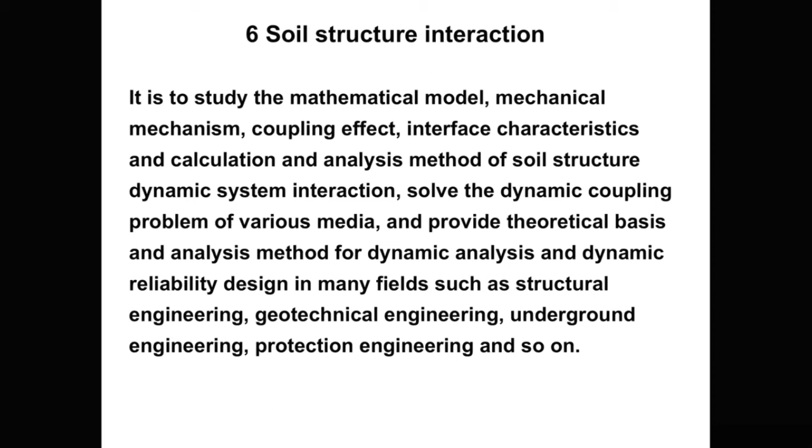The research object in SSI is the seismic wave field, high-rise buildings, large bridges, underground structures, and large dams, connected with the foundation or surrounding rocks in the given input wave field. The dynamic response of the structure and its surrounding soil is studied. Because all these structures are surrounded by rock and soil, the dynamic properties of rock and soil will affect the dynamic behavior of these structures.

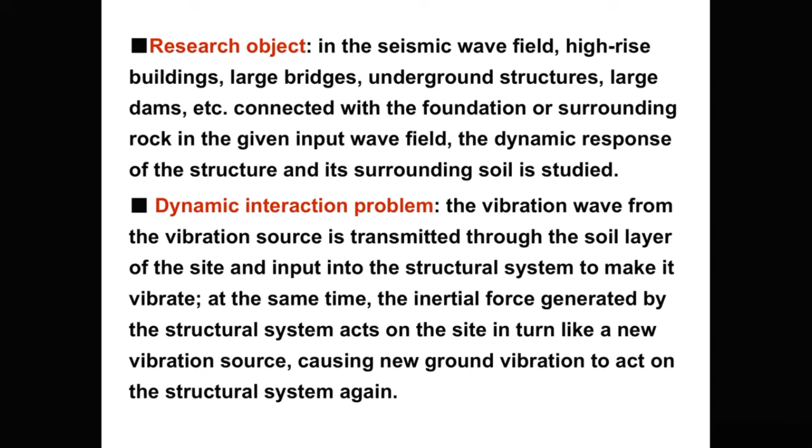If you want the real dynamic response of all these structures, first you must know the interaction mechanism. The dynamic interaction problem includes the vibration waves from the vibration source being transmitted through the soil layer of the site and input into the structural system to make the structure vibrate. At the same time, the inertial force generated by the structural system acts on the site in turn like a new vibration source, causing a new ground vibration to act on the structural system again. This is the soil structure interaction.

Let's see some system. You see a building, a frame building, or an upper building set on the soil, and the soil is layered soil. At the bottom, we can find bedrock. When the earthquake occurs, the earthquake wave will transfer from the fault to the bedrock, then to layered soil, at last to the structure.

This is the system. In the beginning, before we knew soil structure interaction, we took the soil as a rigid body. Then we applied the earthquake wave on the rigid block, like a base of the upper buildings. And upper buildings we can describe by some mechanical system. For example, here we give a spring and damping to describe the upper structures.

And we can also describe the layers or floors of the structure. We use mass points to describe each floor, and use spring and damping to describe the connection between the different floors. Then we can analyze the response of the upper structures.

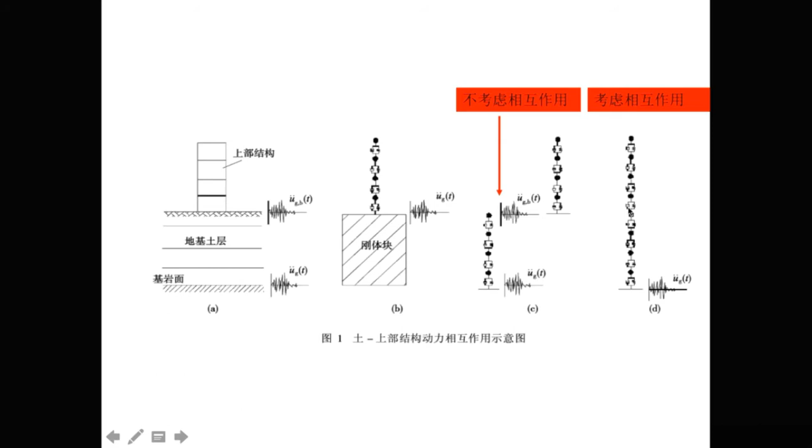Here, let's see some simple models of soil structure interaction. This is a prototype model. A structure using a mass point and a bar. This is an upper structure set on a soil layer.

Then we can simplify it into a model. Upper structure and the frame, using a spring to describe the frame. And the lower part, there's another mass point. In fact, this mass point is soil, and not only the soil mass, but also the stiffness of soil. We use another spring to describe the stiffness of soil. Then we create the simple soil structure interaction system.

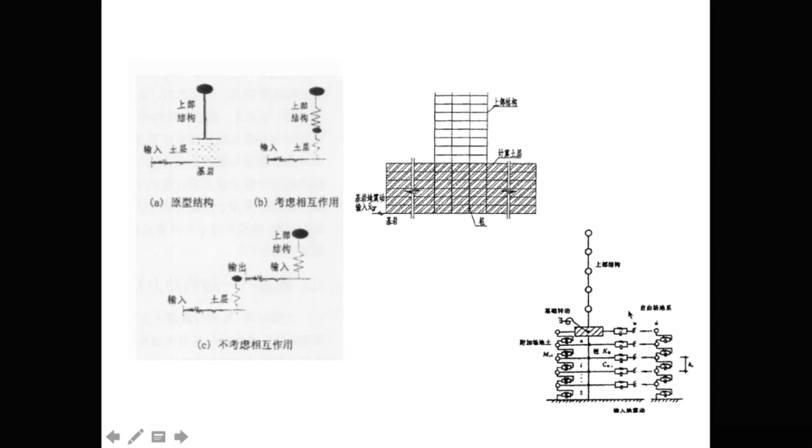But the far field soil will also affect the dynamic response of this system. Then we also use some viscoelastic model to describe the effects of the far ground. Here, this is the model for a complete soil structure interaction.

Or in the soil structure interaction field, this model was developed by scientist Penzien, and we call this the Penzien model.

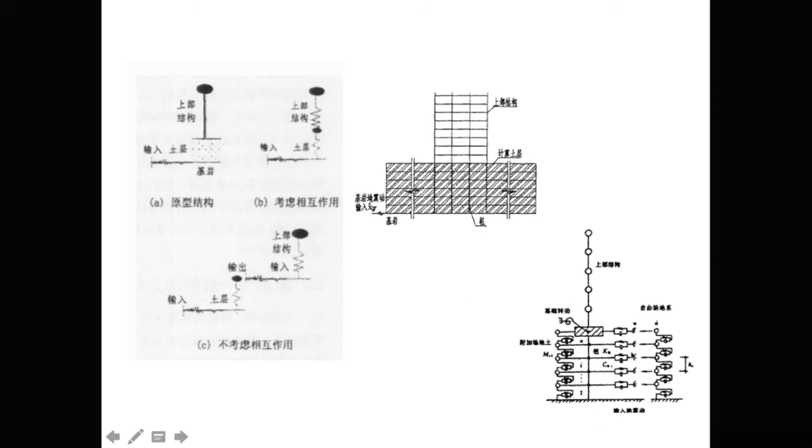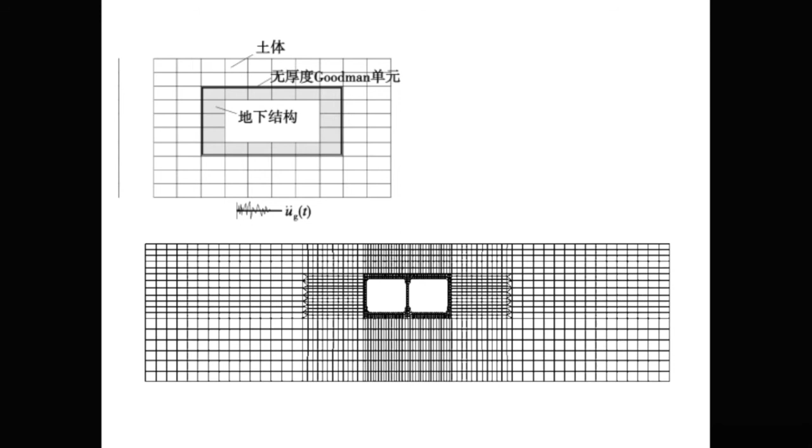Here's a special thing in soil structure interaction. In the joint surface between the soil and the concrete structure, because they have different stiffness, under the same stress condition they have different deformation or strain. Then perhaps there's a relative movement in the joint surface. In the joint surface, we have to use a special element. Later, I will introduce how to deal with this joint element.

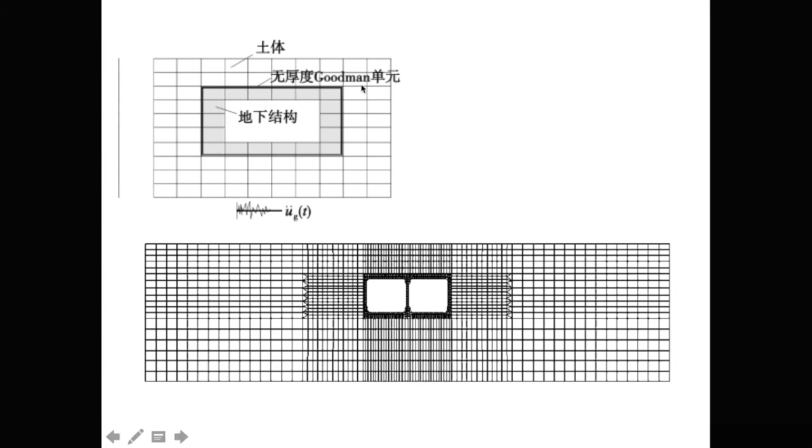Here, for example, this is the Goodman element. The Goodman element is a kind of joint surface element.

And usually this underground structure is a tunnel. This tunnel during an earthquake will have a deformation, and this deformation is along the axis - we call it axial bending deformation. This bending moment will cause failure in the underground structures.

Or in the cross-section area, there's also a deformation. For example, for an underground structure with a circular shape, it will change shape in the earthquake. Or for the underground frame structure, it also has a shear deformation in the cross section.

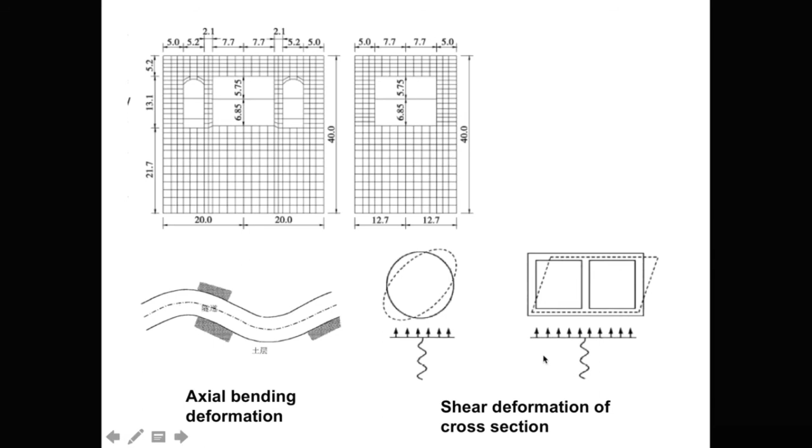Usually we consider that underground structures will not have earthquake damage, but in fact, in some strong earthquakes, we can also find damage in reinforced concrete underground structures.

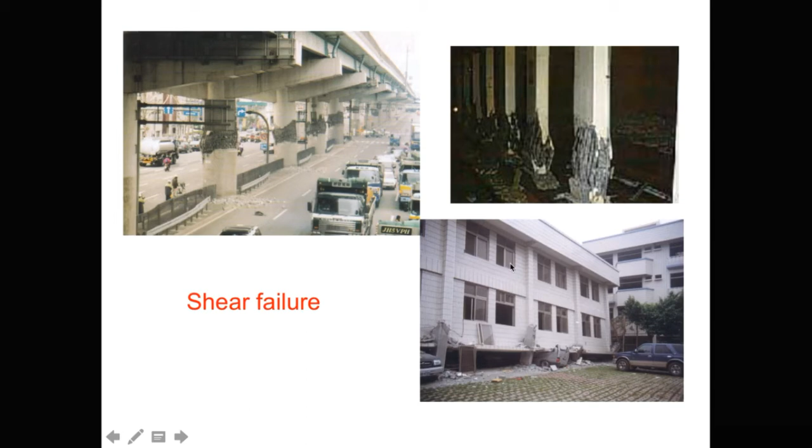It's a building with a vertical parking layer. Usually the upper floors have walls and windows, but the bottom layer, used for vehicle parking, doesn't have so many walls. In this condition, the shear resistance is not enough. Usually in an earthquake, failure will occur in the bottom parking layer. This is a kind of shear failure, usually due to the weight of the upper structure during the earthquake.

There's also soil structure interaction in geology failure. For example, if we build a retaining wall for a highway, and in an earthquake there's a slope failure or landslide, it will generate higher pressure acting on the retaining wall and cause failure.

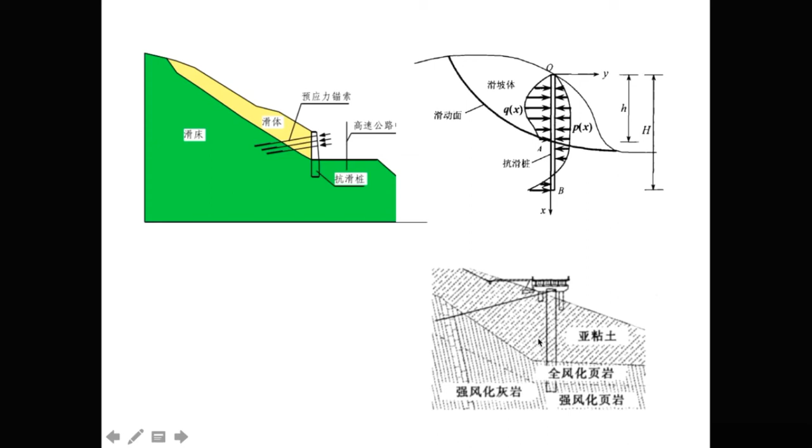Or consider a pier of a highway bridge. In an earthquake, there's a large inertial force or soil pressure acting on the pier, finally causing failure of the pier. This is a picture of a bridge pier on a slope.

Usually in this condition, the force acting on the pier, the soil pressure, is not easy to calculate. When the soil applies lateral earth pressure to the pier, this pressure causes deformation of the pier, and this deformation causes additional pressure from the soil. This is a soil structure interaction problem.

We can't calculate it using only one equation, meaning we can't just consider the soil pressure to calculate the pier deformation, or just use the pier deformation to calculate the earth pressure. We have to solve this soil-pier structure interaction problem at the same time.

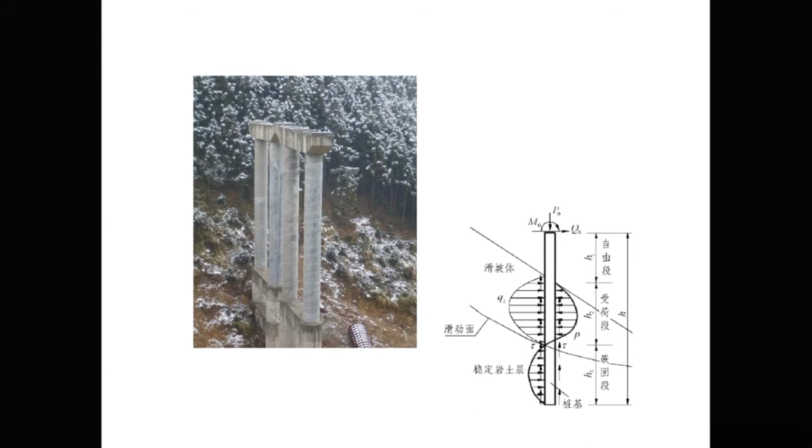The soil structure interaction problem also concerns some hydraulic structures. This is an arch dam, a very large dam connected with the surrounding rock. In earthquakes, we have to consider the deformation of the surrounding rock.

Then we build the model like this. This is a very simple model, a two-dimensional model, with the concrete dam and the surrounding soil, and the far away free field effects.

This simple two-dimensional model can solve seismic problems, but it cannot consider all of the soil structure interaction.

This model is a three-dimensional finite element method model. It can analyze the whole soil structure interaction system, so it can properly consider the soil structure interaction.

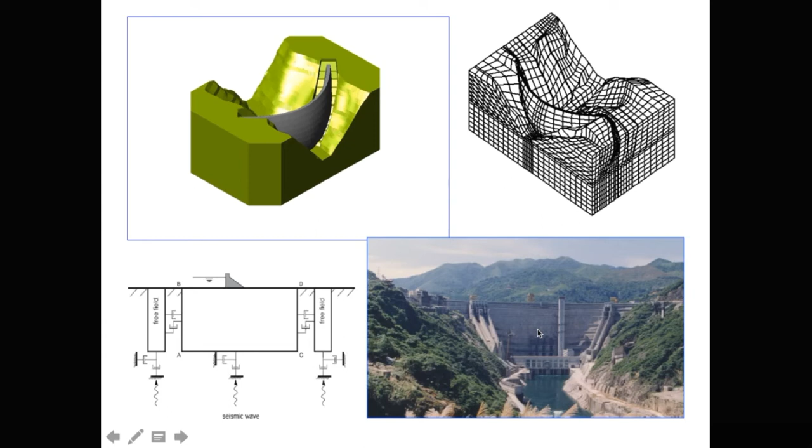Now let's see the analysis system of soil structure interaction. In this system, the subject is divided into three parts: soil, structure, and the joint surface between the soil and the structure.

For soil, we have to know the soil dynamic behavior, then select or develop a constitutive model of soil. Usually we use an elastic model or a non-elastic model. Obviously, for soil, an elastic model is not valid, so we usually have to select some non-elastic model, for example, an elastoplastic model or a viscoplastic model, viscoelastic-plastic model.

For structure, we have to know the structure behavior and use some constitutive model for the concrete. We can also use elastic or non-elastic models. Usually for concrete, in soil structure interaction analysis, if we concentrate on the soil, we can use an elastic model for the structure.

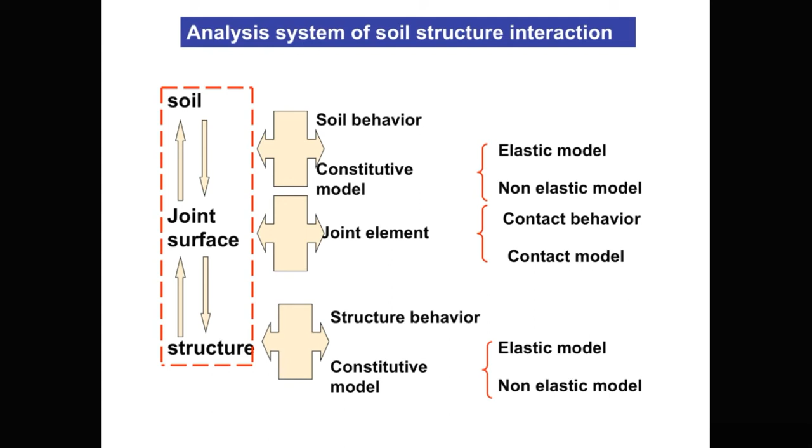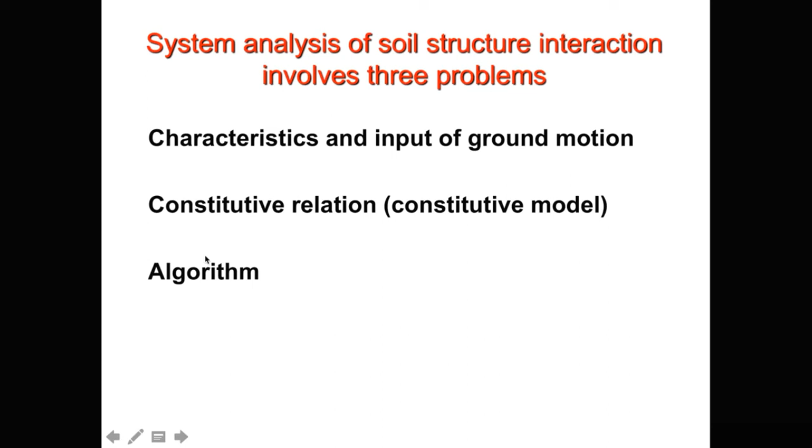System analysis of soil structure interaction involves three problems. First is the characteristic and input of ground motion - this is very important, it's a dynamic load. The second is the constitutive relation or constitutive model to describe the dynamic behavior of soil. Then, algorithm - we use different methods to solve these questions.

First, let's see ground motion and ground motion input. There are three elements of earthquake motion. First is the duration of ground motion, that's the time. The characteristic of ground motion intensity is usually the amplitude of this motion. And the spectrum characteristic of ground motion, that's made up of different frequencies in these waves.

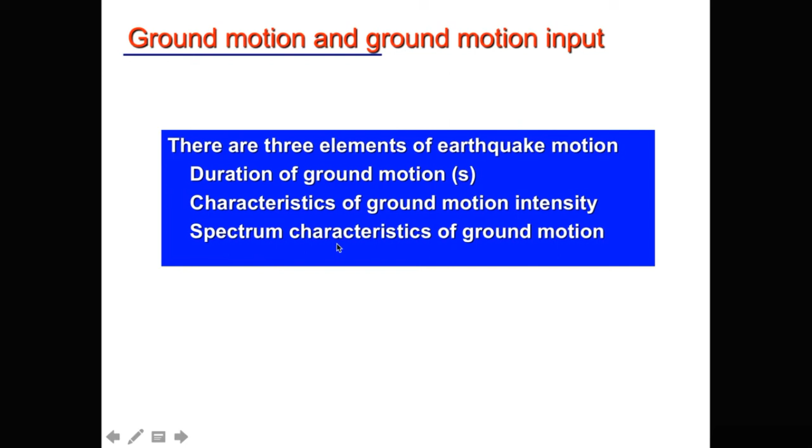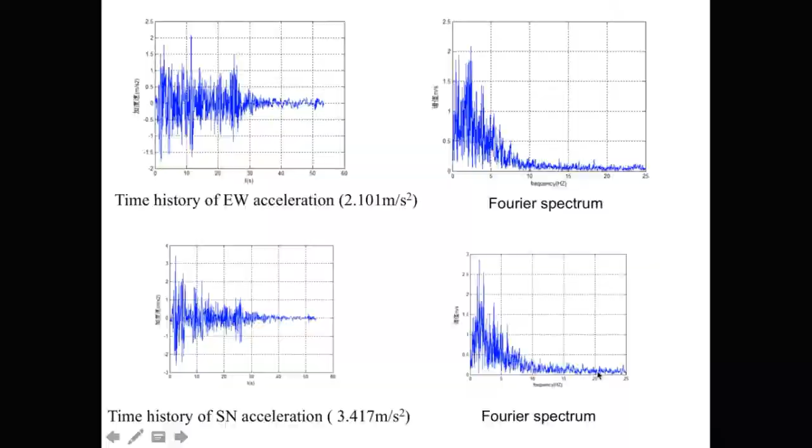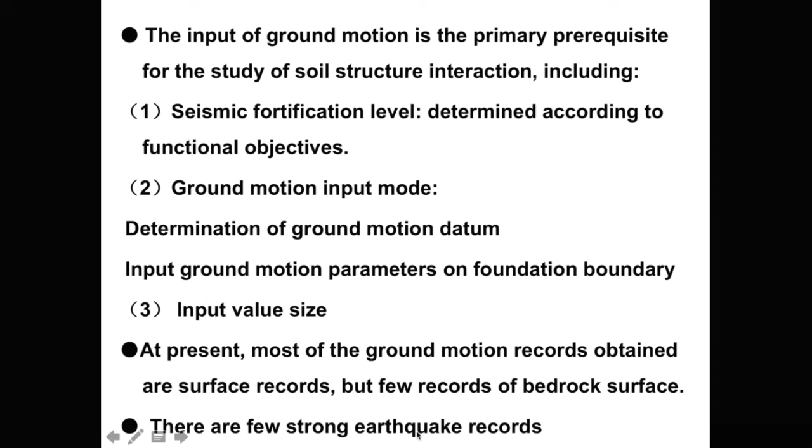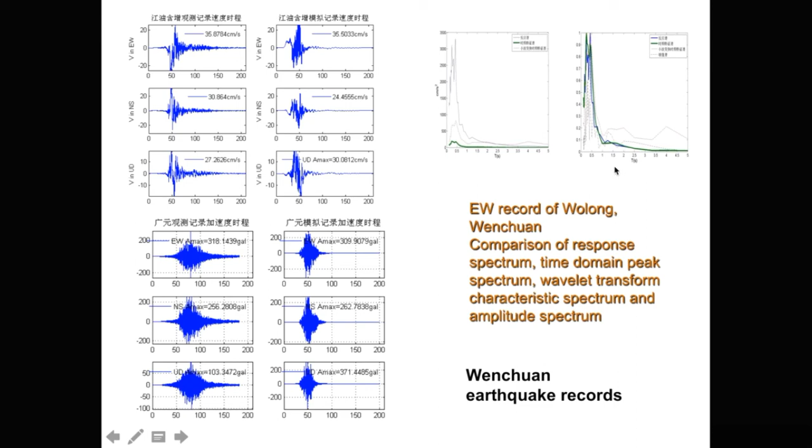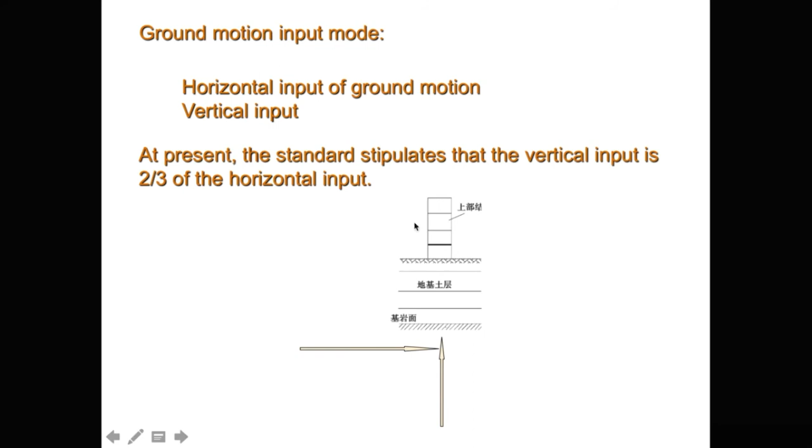At present, the standard stipulates that the vertical input is 2/3 of the horizontal input. That means if you only have one horizontal curve, but when you calculate you want to use two waves, you can generate vertical waves using horizontal waves. We just take the horizontal wave acceleration value, the amplitude, times 2/3, then get the vertical amplitude. Then we can use horizontal waves and vertical waves for the soil structure interaction system in two-dimensional analysis.

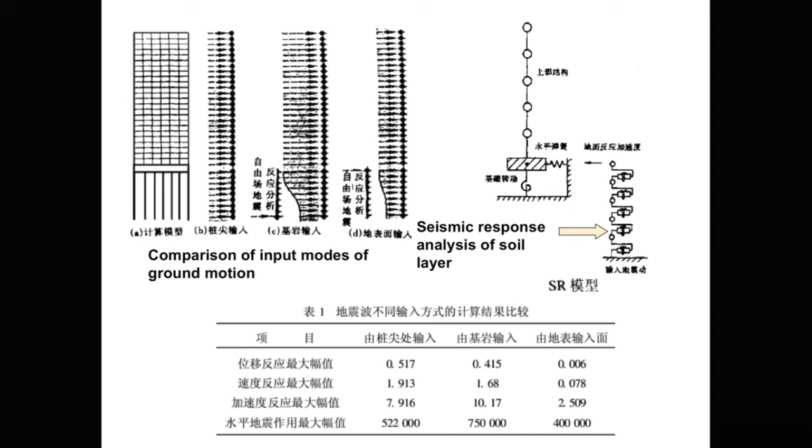For the velocity response, the largest amplitude is also from input at the bottom end of the pile, and the smallest value is from input at the ground surface. The third line is the acceleration response, the largest amplitude. Now we find the largest is not from input at the bottom end of the pile, but from input at the bedrock. Also, for the horizontal earthquake action, the largest amplitude is also the response using input at the bedrock. From this table, we can find that different input locations cause different response results.

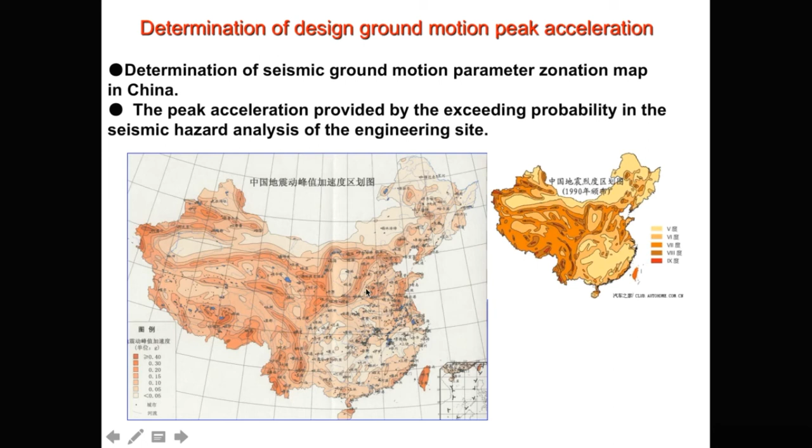Now let's see earthquake waves. We already know there are at least 2 waves. It's body wave, P wave and S wave. P wave has a maximum velocity, and will first arrive to the structure foundations. The vibration direction is consistent with the propagation direction.

It causes the ground to vibrate up and down, because the earthquake wave is transmitted vertically from the soil, vertically up from the soil. Then this P wave will generate up-down movement or up-down vibration.

But shear wave, the vibration direction is perpendicular to the propagation direction and causes horizontal shaking of the ground. It is the main cause of building damage in an earthquake. Usually it will cause the horizontal shaking and cause heavy damage to the structure.

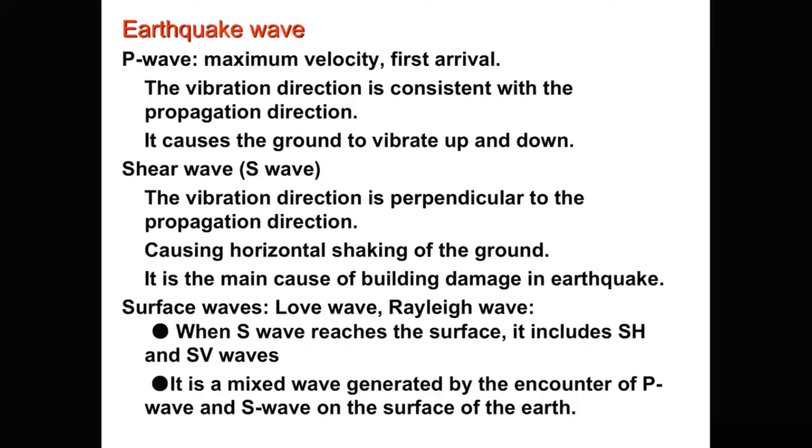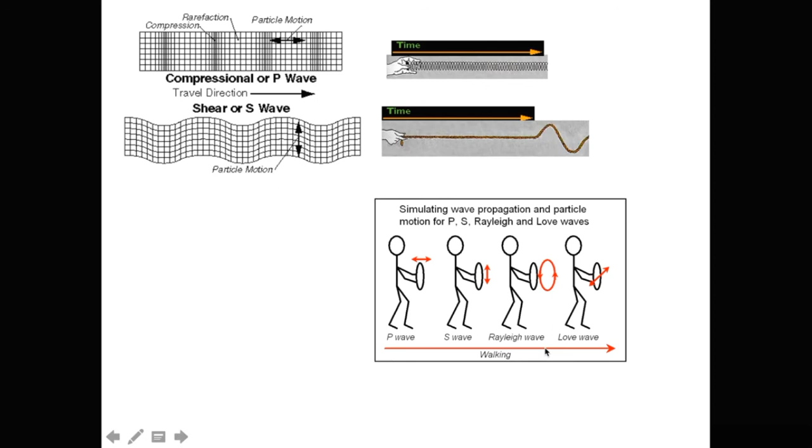Or the movement is rotating in a vertical surface, then it's Rayleigh waves. If the movement is horizontal, it's Love waves. Using this picture, we can easily understand P waves, S waves, Rayleigh waves, and Love waves.

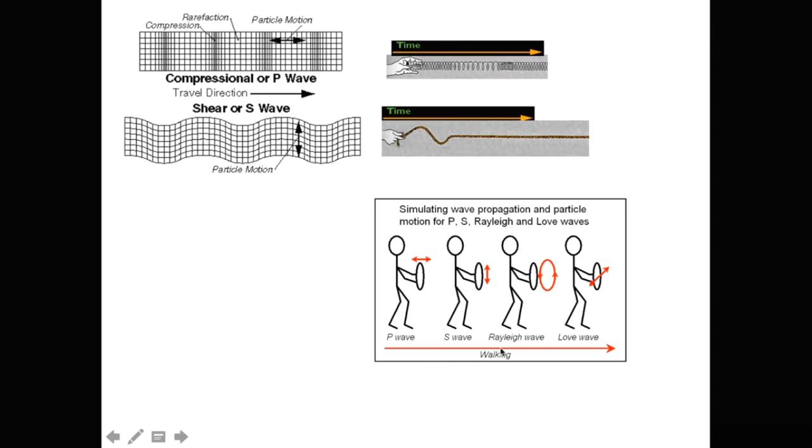When the seismic waves propagated from the depths of earth reach the surface, its incident direction gradually becomes close to the vertical direction of the horizontal surface. Usually it will occur that, in general, the two horizontal components along the surface and the vertical component perpendicular to the ground surface are taken as the seismic acceleration.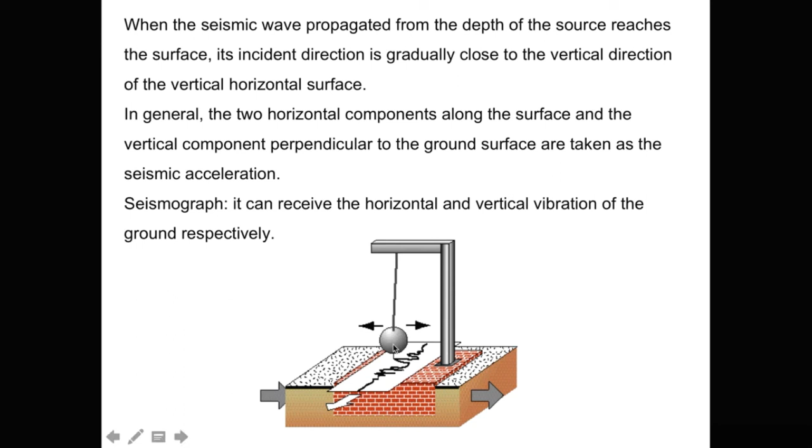Seismograph can receive the horizontal and vertical vibration of the ground respectively. We can record the earthquake wave.

Now, in soil structure analysis, how to select the earthquake waves? According to the site condition, the frequency spectrum is corrected by adjusting the amplitude and the time scale of the measured seismic wave. The scaling of seismic acceleration amplitude does not change the spectrum characteristics and the duration.

Yes, we can scale the seismic acceleration amplitude according to the maps. Maps give the PGA, according to the PGA maps, national maps of PGA. And adjustment of predominant period of seismic wave.

The measured seismic wave is used as input, and the artificial seismic wave is synthesized based on the design. Sometimes we couldn't get a suitable earthquake wave recorded in an earthquake, then we can use artificial seismic waves. Artificial seismic waves are generated or created by engineers according to some rules.

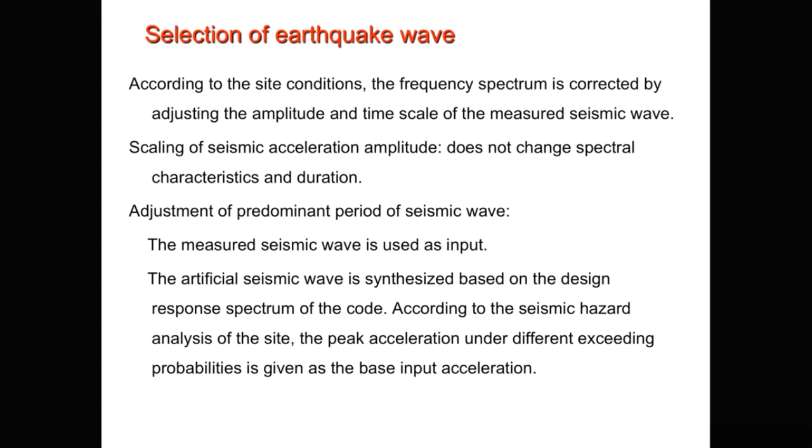Let's see the synthesis of artificial seismic waves. Here, this is the generated artificial earthquake wave, and this is the spectrum of it.

Now let's see. This is the standard acceleration response spectrum curves of 4 types of site in the code. The intensity is 8, and design ground motion is group 1. We divided the ground into 4 types according to the stiffness of ground. For different types of ground, we have to use different response spectrum, given by the national code.

This right one is the response spectrum curve of the same site with different damping ratio, at intensity 8, class 2 site. Here are 4 spectrum curves with different damping, from 0.05 to 0.1, 0.15, and 0.2.

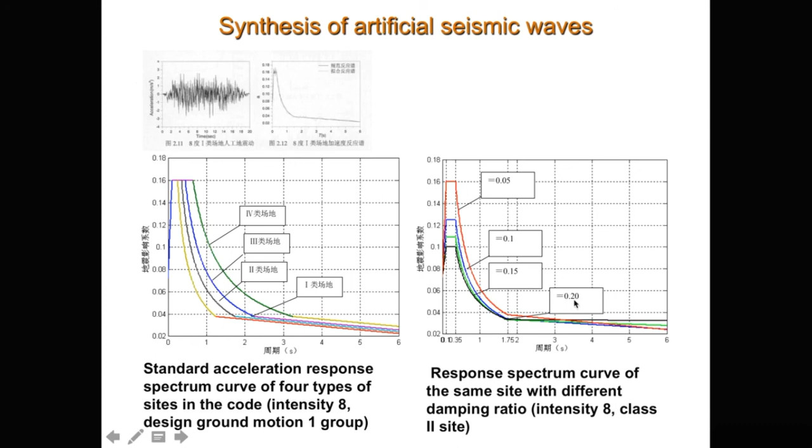Then let's move to another part: constitutive model and the elements of contact surface. This is very important. Here we don't talk about the constitutive model of soil and concrete, because we already learned this part in other courses.

For example, in soil dynamics we have a special chapter to describe the constitutive model - in this lecture, chapter 2. And for concrete, the constitutive model is also introduced in reinforced concrete courses. Here we only need to introduce the constitutive model for the contact surface.

There is a large shear stress on the interface between soil and structure, caused by the inconsistent deformation of the two materials. They have different stiffness, but they have continual stress distribution, so the deformation is inconsistent. It is very important to analyze the deformation mechanism of the contact surface, the development of shear failure, and the process of load transfer, and to simulate it correctly in calculation.

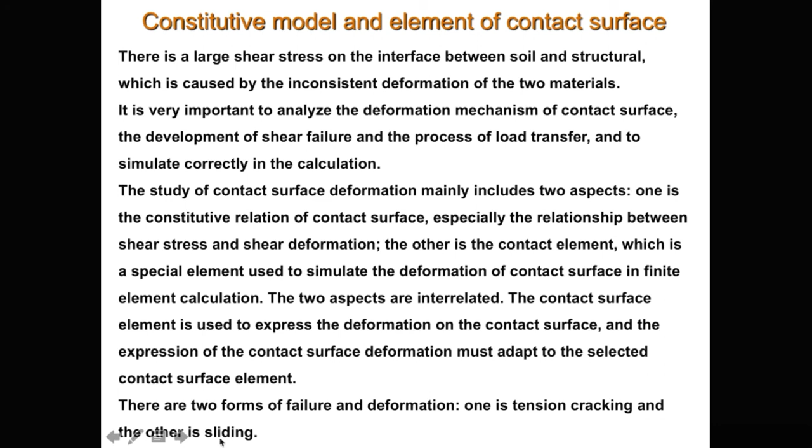There are two forms of failure and deformation: one is tension cracking, and the other is sliding.

Now here is a direct shear test for the soil structure joint surface. The upper part is the soil specimen, and the bottom is the concrete specimen. We can install some sensors in the concrete surface to test the stress in the soil. We use a container, a box, putting the soil specimen in the box and letting the soil contact the surface of the concrete.

Then we give a horizontal force so the soil specimen has lateral movement, and we can find that in different locations they have different shear stress. So in different locations they have different stress - it is not uniform. The shortage of this kind of test is the non-uniform stress distribution.

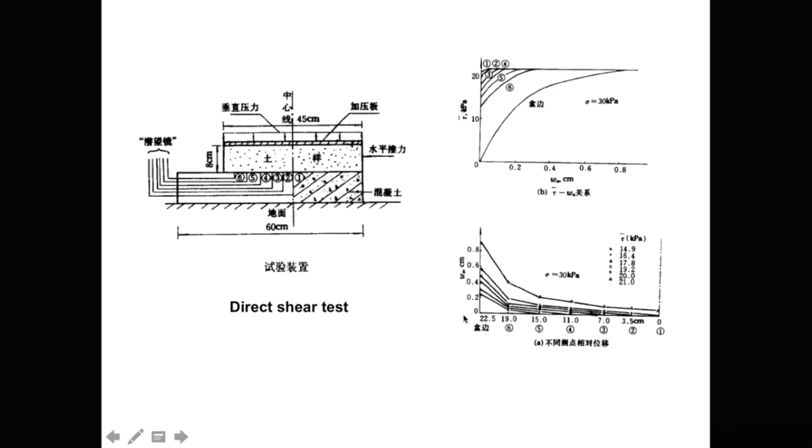There are three types of shear failure in the soil close to the surface of concrete. When the concrete wall is smooth, the sliding surface is along the wall, as shown in figure A. We can find this sliding surface is very close to the surface of concrete.

When the wall is rough, the sliding surface occurs in the soil near the wall. The failure is given in figure B. We can find that the sliding surface has a certain distance from the surface of concrete, and some soil will connect and fix on the rough concrete surface.

The sliding failure is not along one surface, but many surfaces, forming a shear failure zone. This failure surface may have a certain angle with the contact surface, but on the macro level, the failure area is along the contact surface, as shown in figure C. We can find the shear failure occurred in a belt - we couldn't find one significant sliding surface in the failure zone.

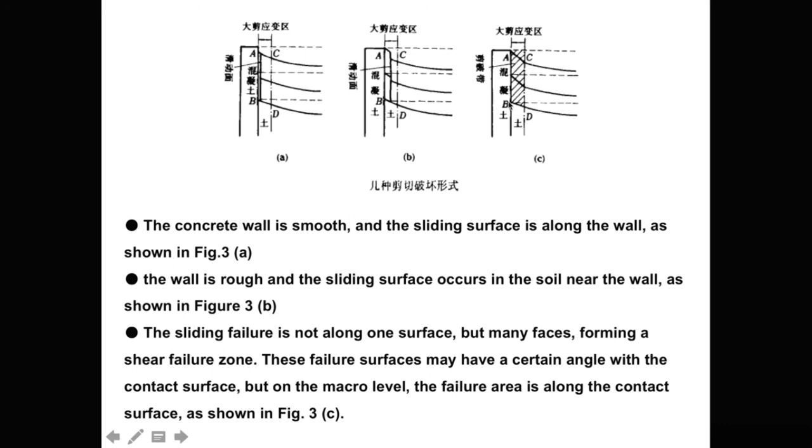The interfriction condition of the soil structure interface has great influence on the calculation results of the dynamic system. So it is necessary to deal with the interface problem reasonably and give a reasonable contact surface connection condition. When you do a soil structure interaction analysis, the interface condition is very important. We must set the joint surface between the structure and the soil.